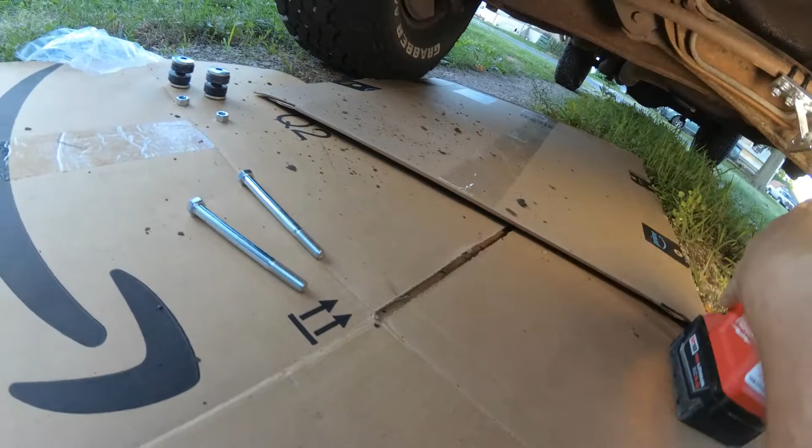Hey YouTube land, I'm working on my Ford F-250 two-wheel drive 1996, and this is what I'm installing, the Rough Country 8733830 dual steering stabilizer. There's been quite a few people wanting an idea on how to do this, and I'm no expert, but I know the instructions are pretty hokey, so I'll show you what I've done.

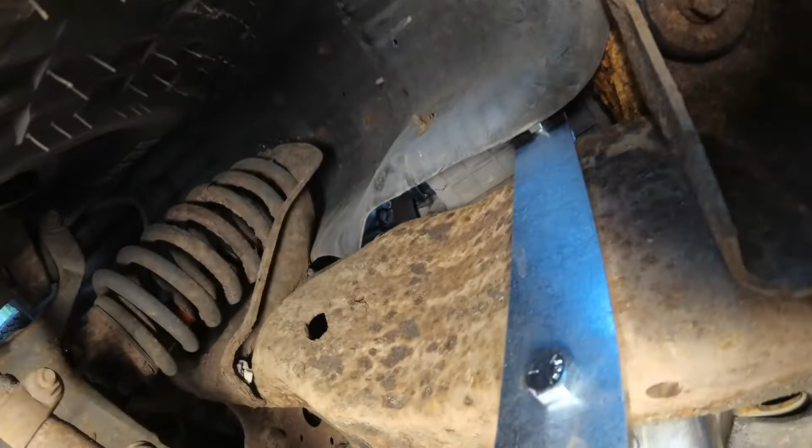They give you two sets of about 5/16 bolts, the longer ones and the shorter ones, and I've installed the shorter ones here. The U-shape faces the center. I've got it just up there. This would be the outside of the passenger side. I've got one bolt up top, one bolt on the bottom. I guess I could put another one if I had another one, but I do not. Then lock washer and nut up there.

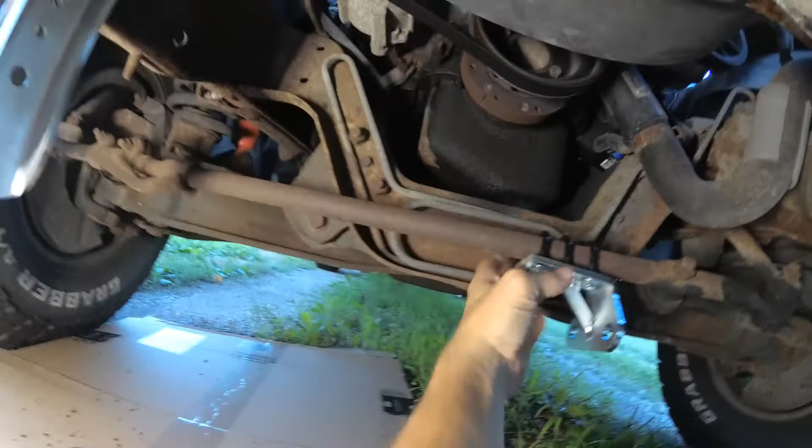I'm hoping this LED light doesn't cause it to strobe, but if it does, I'll have to reshoot a video. Anyway, that's how that goes on. I just had to find basically the skinniest place I could and the nearest I could to the steering arm. Then this part here is where the shocks will mount.

So you'll have the two holes there, two shocks over to this, and they give you three different sets of these U-clamps, I guess to call them. Let's see, those, and then that set, and that set.

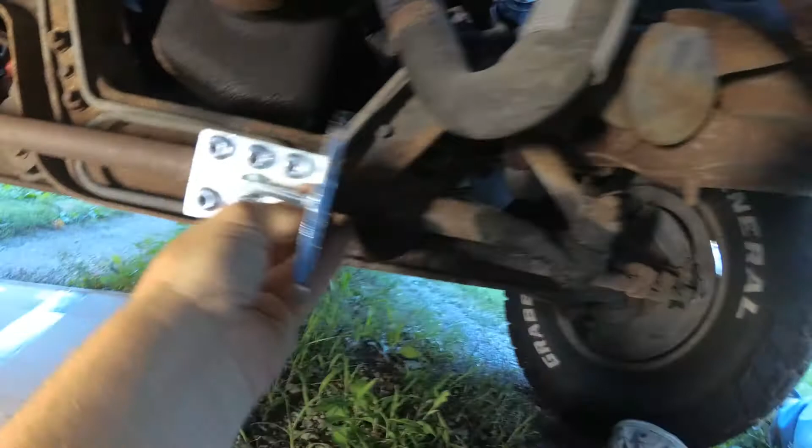So the easiest way I found is to put one in like this and then screw it down from the top, and that way the weight of it's kind of held by the steering arm. Then install all those, so all these will be tightened up down here. This will be tightened up, and then the shocks will go.

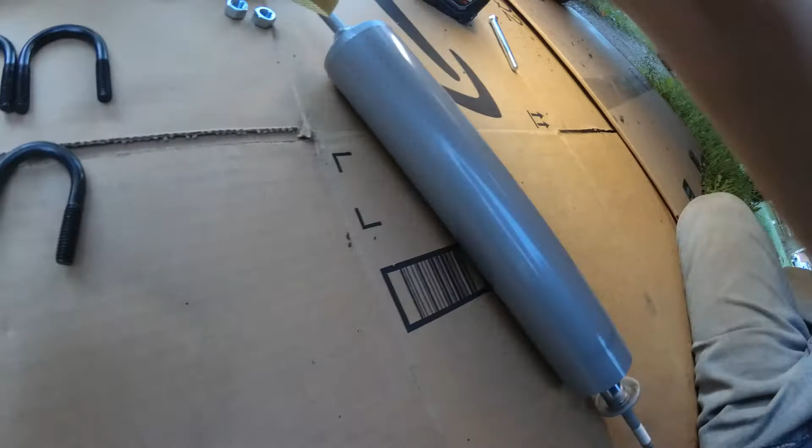I don't have one even ready for you yet, but that was fast. Then these here will go in between those two parts that I just showed you, and you're going to have basically - oops, forgot that - you're going to have a half there that stays without rolling away. Then you're going to have the metal, and it did roll.

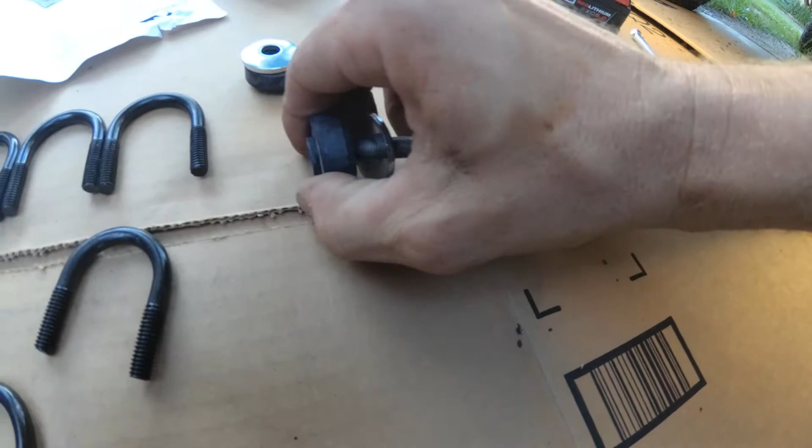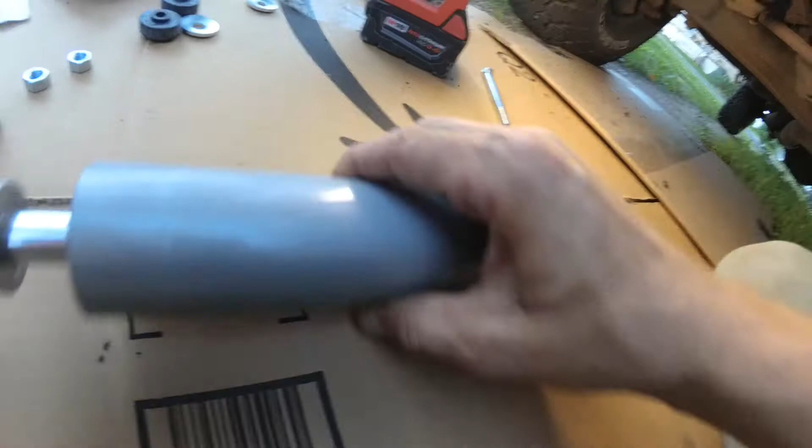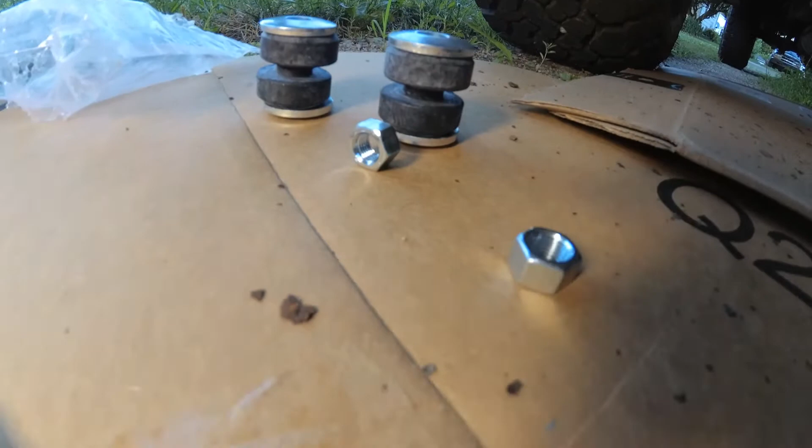But anyway, let me see if I can put this on here for you - not very easily. You're going to have a half, that metal bracket, this other half, a nut, and then basically repeat on this end down here. You're going to have them just like that, and then in the middle is going to be the bracket. That's really all there is to it.

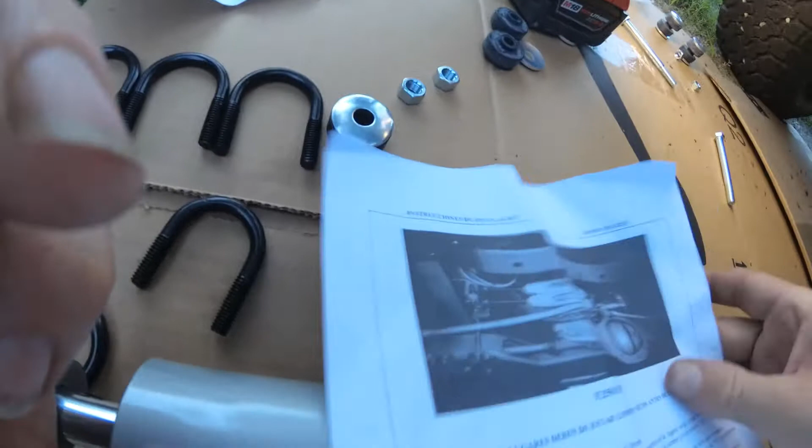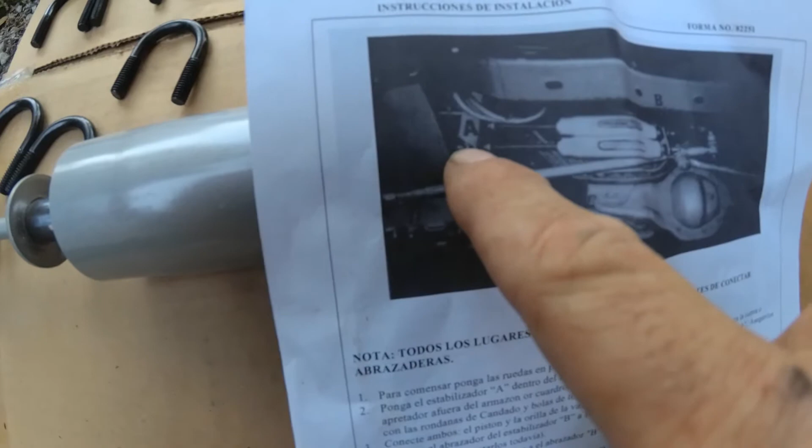I guess if I get it done, I'll show you it all completed. Like I said, they do have instructions with them. They're not exactly the most awesome, but this one here actually shows the bracket going the opposite direction. Then if you go to this picture, it shows them going the other way.

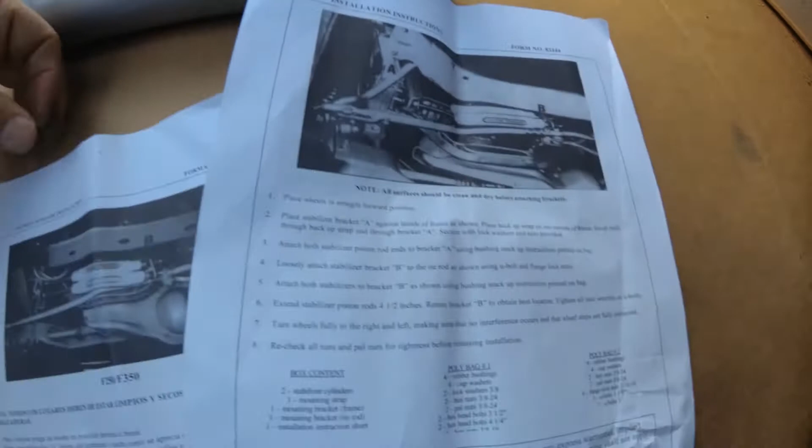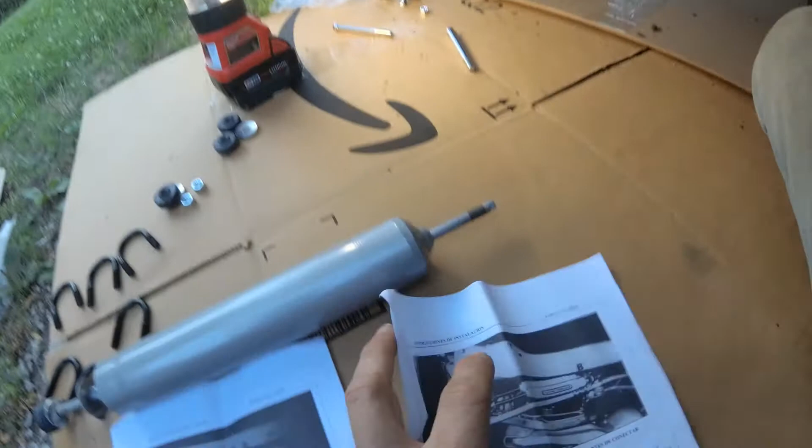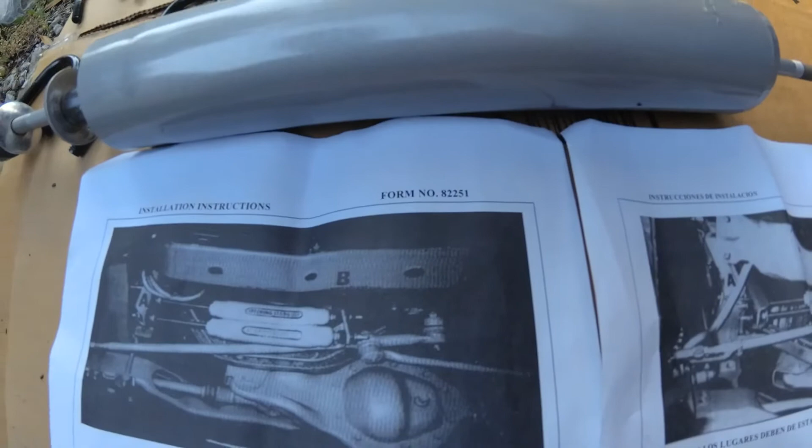So I don't know what difference that really makes, and if somebody else wants to jump in and clear up what the difference is, that would be very helpful. But there are two different form numbers - this one's an 82244, and that one's an 82251, and they both say F250, F350.

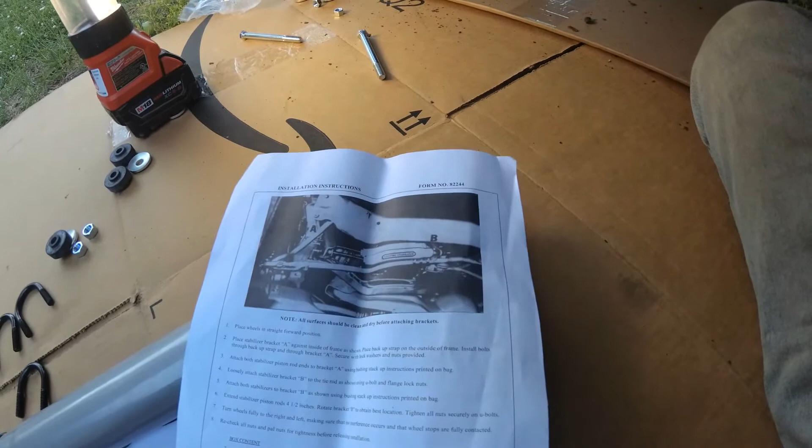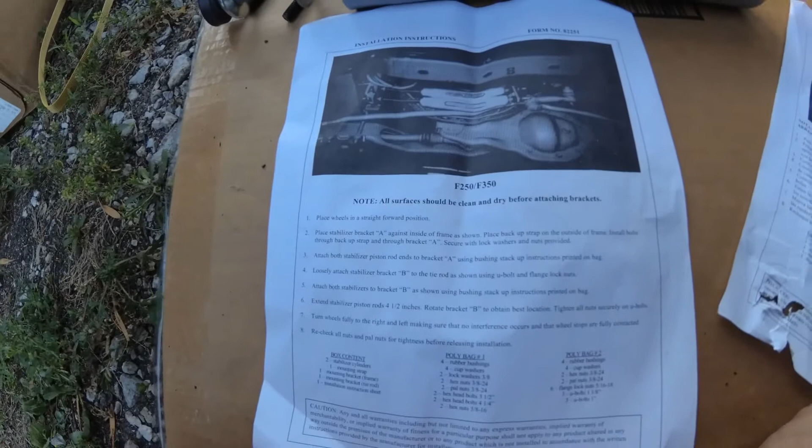So actually this one's partially Spanish, so I'm not sure. I'm probably going to go with how I have it. If I find something different, I'll flip it around and tell you I did, and show you the completed setup.

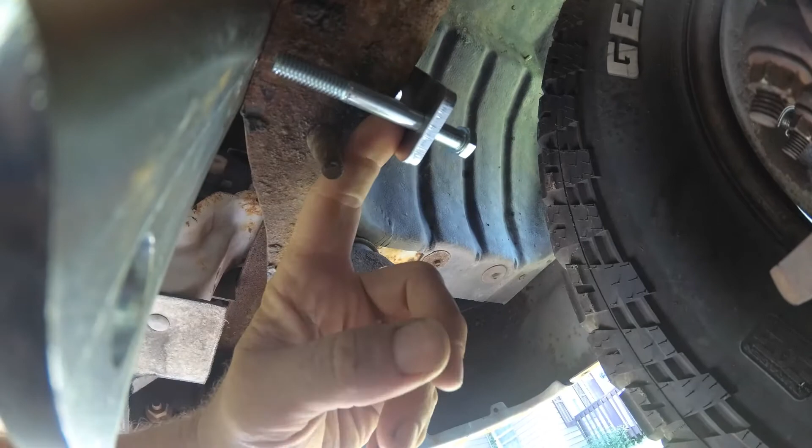So back on this F250, I've jacked around with this bracket, this side, that side, long bolt, short bolt. The issue with it is the bracket, the flat bracket here - the two holes match up exactly to here, but if you can see, like on that side, it's clear of that side, but when you come over to this side, it's partially blocked. So I guess the C channel that's here is flared out a bit and causes this area to be a tad bit wider, is all I can get out of it.

And I'm not sure what this little pin here is for.

It's just annoying, but anyhow, my plan is to see how close that is from going through. I'm just going to cut that down, maybe an 1/8 inch, 3/16, whatever it takes to get that through and mount it. The other reason I'm doing it is because everything else has got weird slants to it. I'm trying to get my shock tucked up here, and if I move it down here, I'm putting it in plane with the other end shock attachment, if that makes sense.

And this here is pointing toward the front of the truck, so it's pointing the wrong direction. If you go even farther to the right, you still don't hit it, but then you're getting way too close to the actual steering arm, or whatever that linkage is called. I know it has a particular name, but I don't know it. But anyhow, that's the only place I could find that's halfway lined up where I need it.

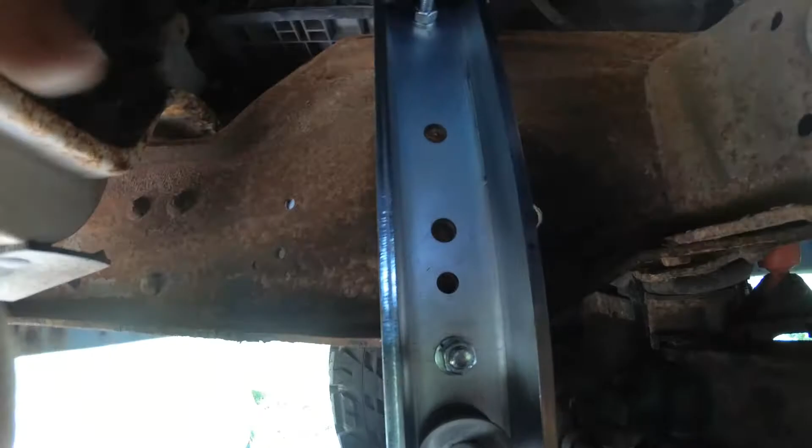So I slotted this hole just 1/8 or 3/16 like I was telling you, just so it could slide through. And this does sit a little tweaked, a little, as you can see here, how much thread's left there. I don't know if I can get it there. No, I can't really see. But there's only maybe 1/8 of an inch there, and probably like 3/4 sticking out there. So it does kick in a little bit, but it doesn't really show it extremely well.

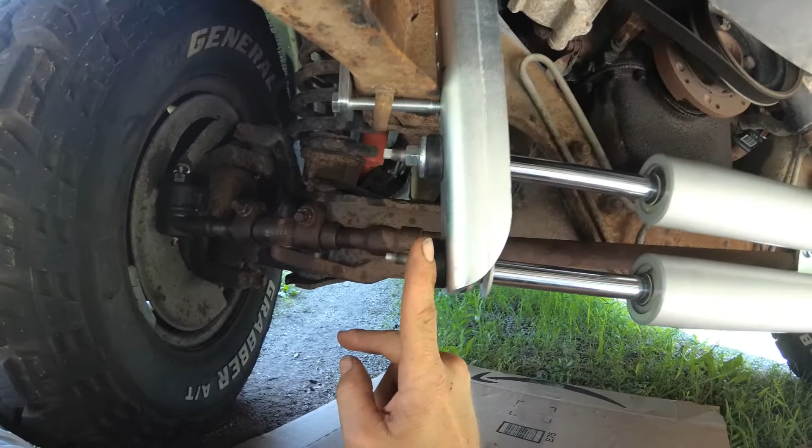But the bottom kicks in a little bit. Not a huge deal, I mean I'd like it to have been better. It's about where this is about straight up from the frame. The only other thing I could do is weld on some sort of spacer up there and kick it out, but I'm not too concerned about that. We'll just see how it rolls.

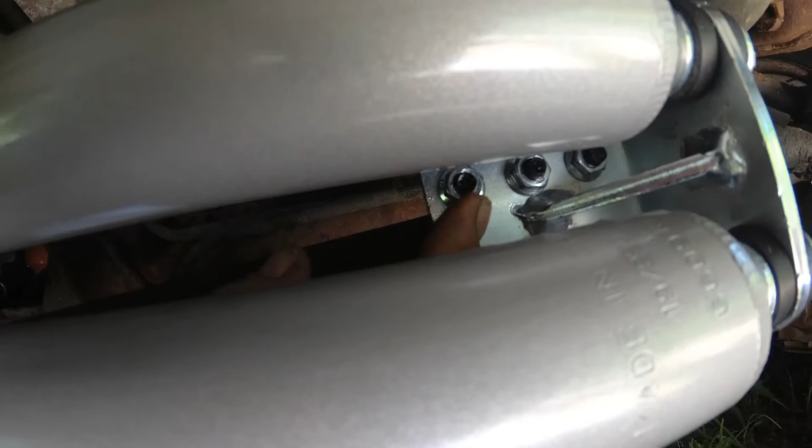The nuts and the heads on these were 14 mil, so were these, but the ones inside here were, I'm thinking 13 or 12, I think they were 12. I can't say for sure, but as far as tools go, it wasn't a whole lot to put together.

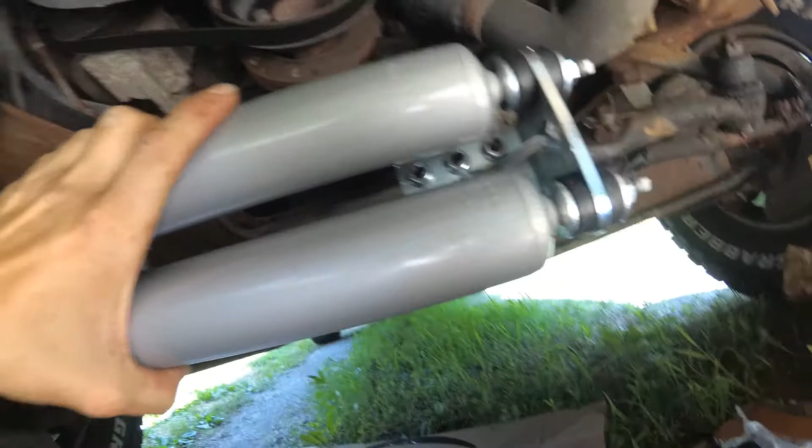And it looks pretty good. I mean, it's extended a little bit. So I did it this way to give it a little bit of extend. If this seems like it's going to overextend, I guess I'll take this off, flip it around, and put this side out to here so it won't be so overextended. But I think that's pretty good. That's probably 4.5, 5 inches there. So that'll give it some more room to go out, and as far as when I turn to the left, yeah, that should take care of it.

Anyway, if you have any questions about it, let me know. Like I said, I'm not a professional, but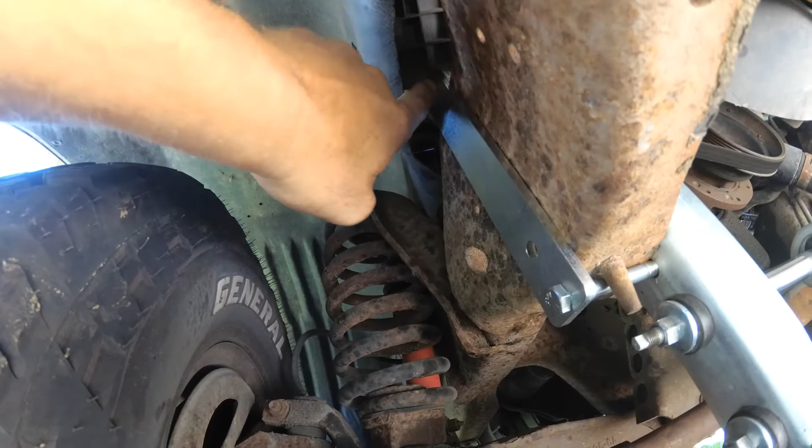This is the best video I think I've seen myself doing, and that's how that's mounted there. It's kind of snug up there. I had to either hold that or put a ratchet on the other side, but no big deal. And there's where it mounted on mine, right next to this little peg, which I still have no idea what it is. So if you're coming from the front, it's 1, 2, 3, 4. If you don't have a peg, it's the 5th hole. Otherwise, it's right up against that peg. And that's how I did it.

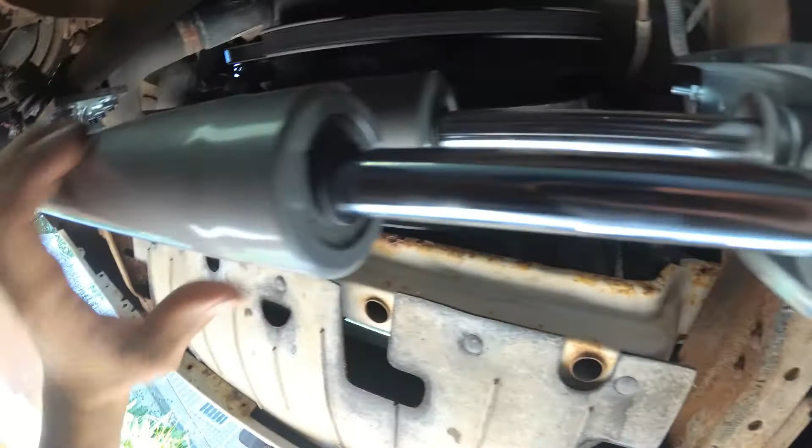Can't say it's right or wrong. Somebody out there might tell me it's right or wrong, but anyhow.